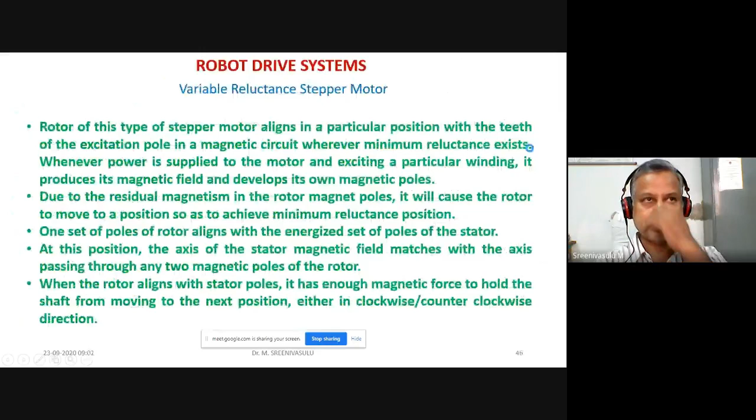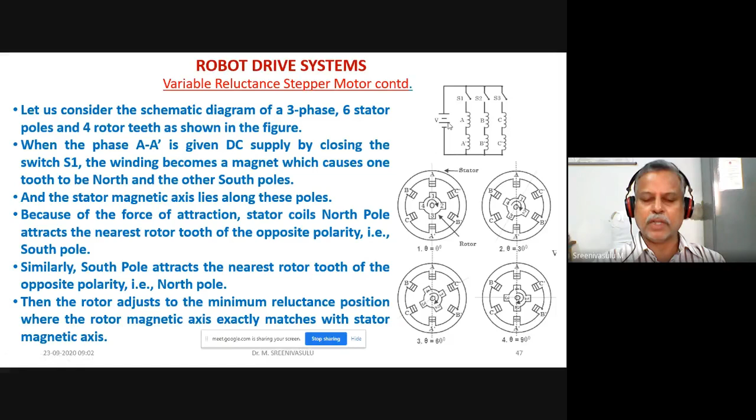In order to change the phases, you are going to play with these switches S1, S2, S3. When S1 is in on mode, the other two will be in off mode, and A and A dash will be in short. When S1 and S3 are open, S2 will be in short, and B and B dash will be in short. When S1 and S2 are open, S3 will be in short, and C and C dash will be excited.

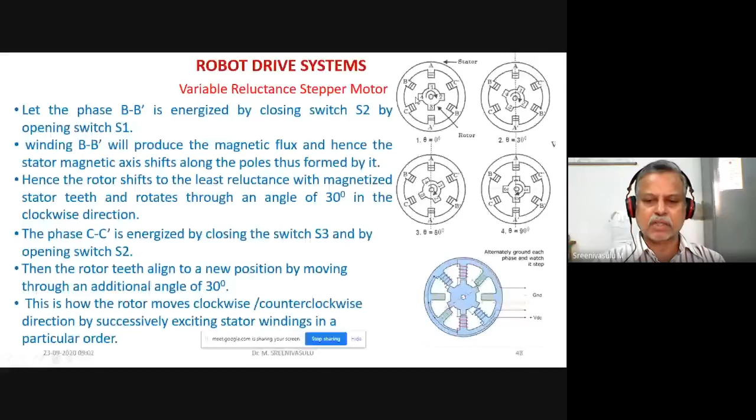Accordingly, the indexing and the angle of index actually depend upon the number of poles on the stator and the number of poles on the rotor. There was an expression to give you an idea: the step angle equals 360 divided by the number of phases, that is 3, multiplied by the number of poles on the rotor, or the number of teeth on the rotor.

When you want to reduce that step angle further, sometimes it may not be possible to accommodate more teeth on the rotor. So instead of a single rotor, they take the support of 3 rotors, and the number of teeth accommodated on these 3 rotors contributes towards the reduction in the step angle.

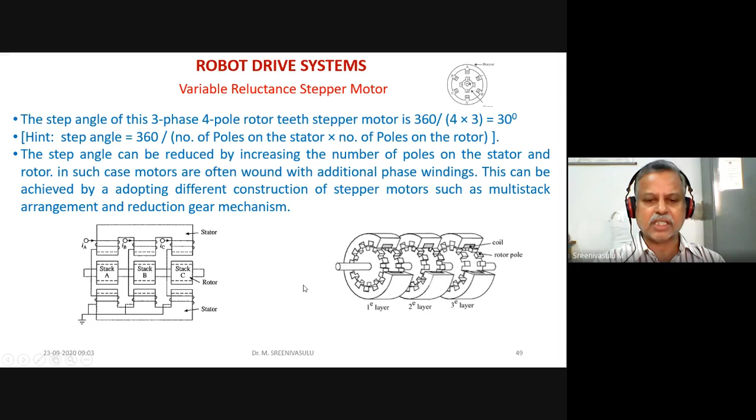Now, this is the permanent magnet stepper motor. Here you can see alternately each and every pole available with the stator is getting excited, and the rotor has a permanent magnet. Because of that, north and south poles have been shown in the picture, and that itself has been made to rotate. Once the north and south poles belonging to the permanent magnet are rotated, the pole which comes close is going to be opposite.

S is actually the south pole, colored blue. So the other pole, whatever is coming close to the south pole, becomes red. The excitation comes first, and that attracts the unlike poles, and that is how the rotation happens.

In the third statement, it has been stated that it works on the principle that unlike poles attract each other and like poles repel each other. This third point was in my mind while explaining other aspects too, because the same concept applies to magnets, whether electromagnetic principles or permanent magnets are used in a motor. North and south poles will attract, and south and north poles will attract, and because of that, the rotation happens.

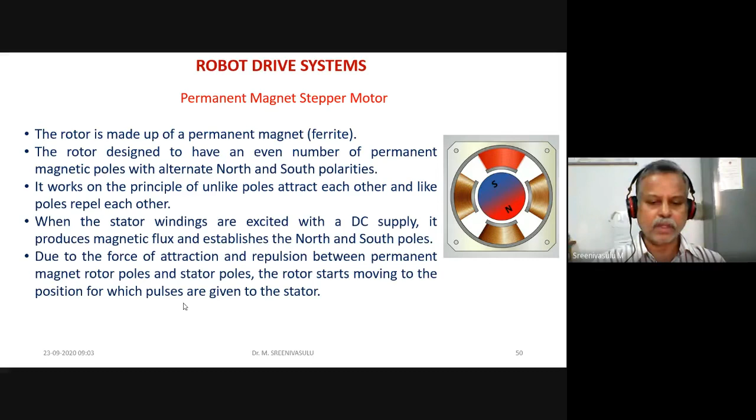Anyway, let us see what exactly is being done here. There were 4 poles, and out of them 2 opposite poles were connected through a wire. That's what has been said here.

Let us consider a 2-phase stepper motor with 2 permanent magnetic rotor poles as shown in the figure: north pole and south pole. For the 2-phase instance, this is phase 1, AA dash, and this is phase 2, BB dash.

In the beginning, when you excite it, south pole forms on the stator, and on the opposite side you see the north pole on the stator. The permanent magnet has north and south poles in a particular direction. North gets attracted by south, so north and south are in line. Here you have south, and that south and north are again in line. So they were attracted, whichever position they were in earlier, and now they try to be in line because of force of attraction and repulsion, and they come in line.

In the next instance, instead of AA being excited, AA was excited first, then in the second instance BB was excited. Because of that, you can see clearly the north and south poles on this side, and south pole attracts the north while north pole attracts the south. That contributes towards the rotation.

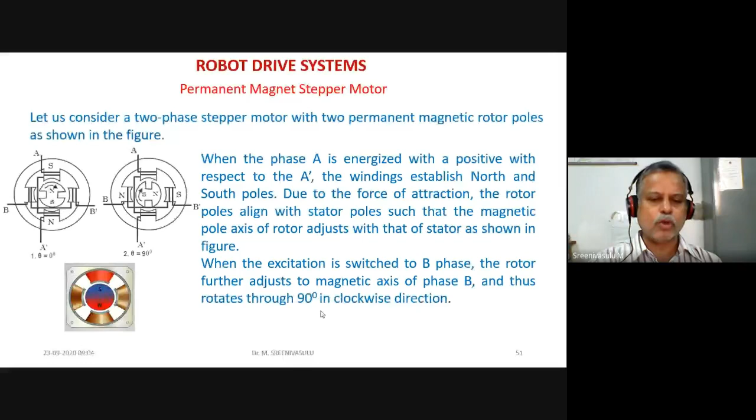Because of this, the indexing, the step angle, is going to happen by 90 degrees. If you go for 4-phase, then the step angle is going to be 45 degrees. Likewise, you can go on varying the number of poles, and that will take care of those things.

You can see here, this is with 0, this is with 90, and next time that is going to be in line, dealing with theta 180 degrees, and this is going to be for 270. So figure 1, 2, 3, 4 correspond to 0, 90, 180, 270, and again 360 which is the same as 0. With reference to these figures, the explanation given earlier proceeds the same way.

Now the calculation pertaining to the step angle was shown. The step angle of this 2-phase, 2-pole permanent magnet rotor motor is expressed as 360 divided by the number of phases multiplied by the number of poles. So 360 divided by 4 gives 90.

The step size can be reduced by energizing two phases simultaneously. In this case, when they want to regulate or manage the step angle, the method is that two phases are excited simultaneously, one phase on and second phase on modes with appropriate polarity. We won't go into depth, but there is a table where on/off states are indicated with 1s and 0s, and that order keeps changing, which is how they control all those regulations.

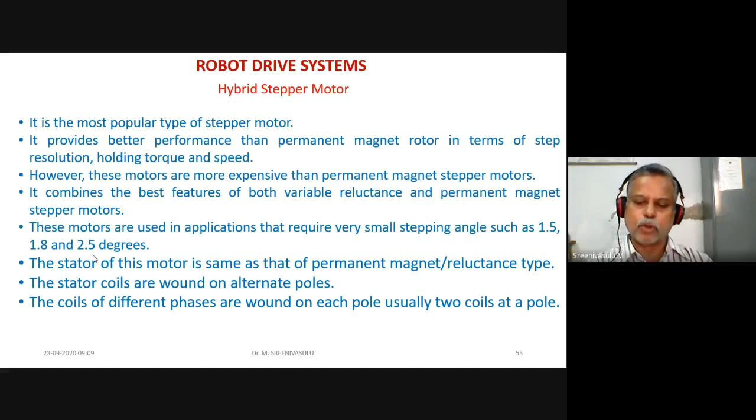The coils of different phases are wound on each pole, usually 2 coils at a pole. That's the meaning there. Anyway, if you consider the stepper motor here, you can see the rotor.

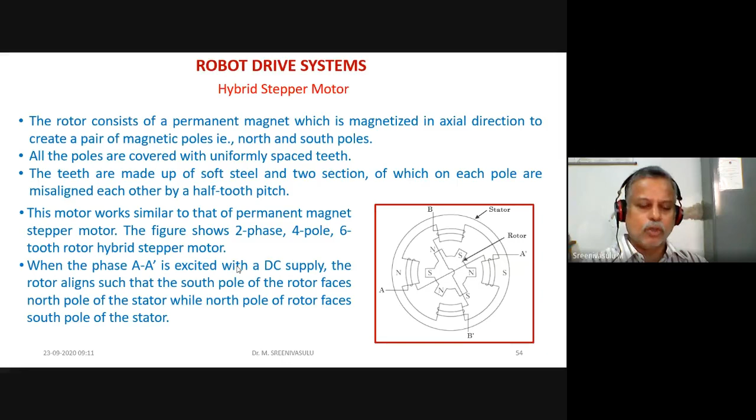Once you know the principle of operation for one motor, the same principle applies for everything. For every excitation, the rotor will get locked into a new position, and even if excitation is removed, the motor remains in its locked condition due to the permanent magnet excitation. The advantage of the permanent magnet is that it continues the attractive force, keeping the locked condition even when excitation is removed. That means when there is no supply for either phase AA-dash or phase BB-dash, the self-excitation of the permanent magnet ensures that the rotor will never be permitted to rotate.

In the permanent magnet type motor, the step angle was observed to be 90 degrees. Here, the combination of permanent and variable reluctance is the hybrid type, associated with two-phase, four-pole and six-tooth rotor motor. Now, considering the number of phases and number of teeth on the rotor, the same expression as before still holds good: 360 by 2 into 6, which equals 30 degrees.

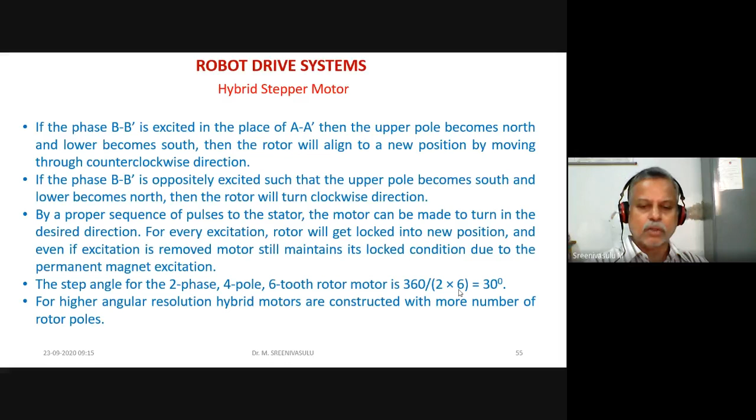So what you should understand is, earlier at the time of specifications, we noted the accuracy we want to achieve, the minimum displacements, and what might be the work volume we need to handle—whether that is on par with Cartesian, polar, or spherical coordinates. All those requirements should be stated.

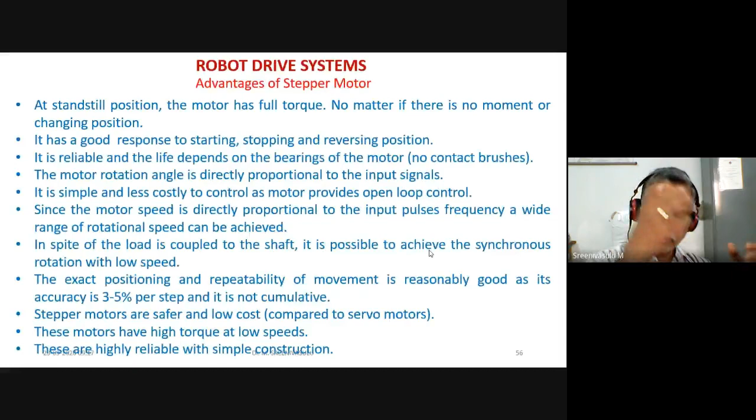If you don't state your requirements properly, you can see here, once the step angle has been fixed by the number of teeth on the rotor, even if you intend to get a much smaller step value, it is not possible. If you want to make it possible, the entire motor you procured earlier would have to be replaced. That is why, at the time of placing an order with a particular specification, we must be very careful and keep all aspects in mind before proceeding. Prior planning is essentially required for any sort of success you are aiming at.

Let us see what has been stated here. At standstill position, the motor has full torque—this is basically because of the permanent magnet—no matter if there is no movement or changing position. That means, in the standstill position, there is full torque, so if you try to move it manually, you cannot, unless you push it with a higher amount of torque than what it is exerting, which might spoil the motor.

It has a good response to starting, stopping, and reversing positions—the moment you want to start, it starts; the moment you want to stop, it stops; the moment you instruct it to reverse, it is ready to do so. It is reliable, and its life depends on the bearings of the motor, since there are no contact brushes.

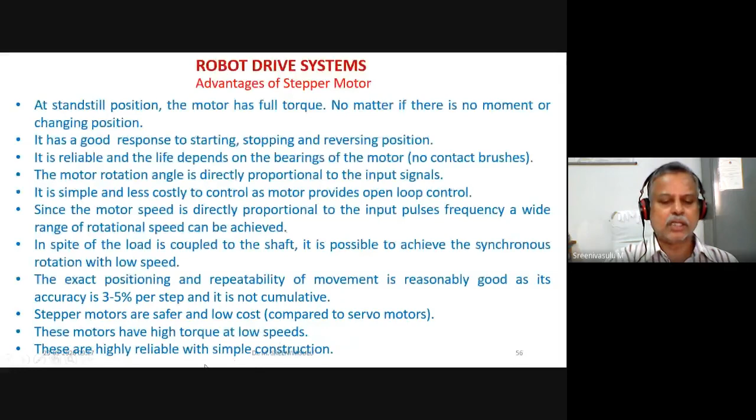Then, in spite of having so many advantages, some disadvantages will be there. These disadvantages and advantages are being represented keeping in mind the other two motor types, with respect to both advantages and disadvantages.

Stepper motors have low efficiency. It has low accuracy — contradictory statements have come because earlier we stated that this has good repeatability and accuracy, but now here they are stating it has low accuracy. That low accuracy may be because of the open loop circuit, or maybe with respect to comparisons being made with one of the other two motors.

Its torque declines very quickly with speed. At low speeds, no doubt it has high torque, but when the speed rises, the rate at which the torque declines, compared to the rate at which the speed rises, is noticed to be very, very high with respect to the other two.

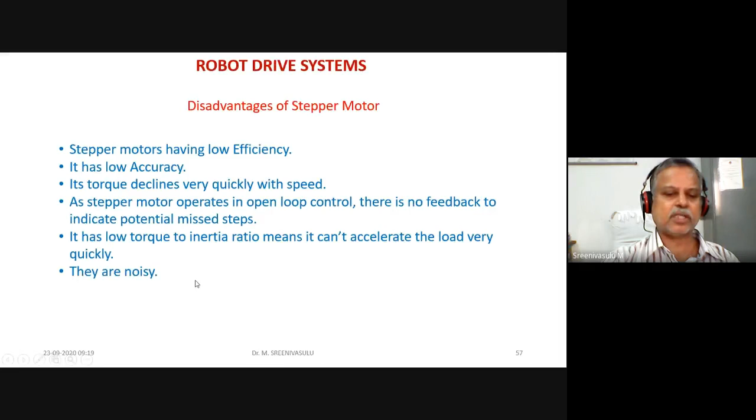Anyway, they are noisy. So at the time of their operation, we found that they make a lot of noise. Some applications, when you look at manufacturing sector and security devices: in manufacturing, like automated production equipment, automotive gauges, and industrial machines for packaging, labeling, filling and cutting.

You may notice these applications are so simple: packaging, labeling, filling and cutting. But the pace with which they can finish those tasks is incomparable with the pace at which a human can manage those issues, because they deliver those jobs without experiencing any discomfort, even if put to work for many hours continuously. It is not the case with human beings.

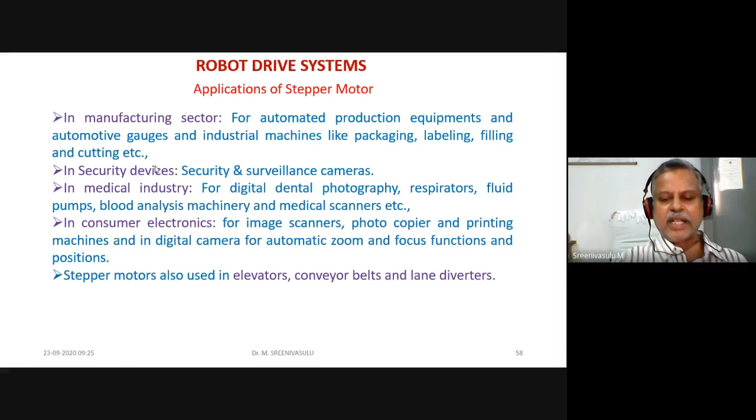Now let us move to the servo motor. A servo motor is an electrical device that rotates parts of a machine with high efficiency and great precision. So the first statement itself gives its advantages with respect to precision and efficiency. The moment this is stated, it indicates that its performance was compared with the available motors. Maybe at the time of inventing that particular servo motor, whichever motors were available were all taken into account for comparison.

With reference to that only, this statement would have been issued. The servo motor could be DC or AC, and they can be used to push by a specific distance, or to rotate an object by a specific angle with great precision. It is a simple motor which runs through servo mechanism. What is the servo mechanism? We will see if time permits.

One particular aspect you should keep in mind is that servo motors make use of, or take the support of, servo mechanism to control its motion. It could be linear motion or rotary motion. So the servo mechanism might be an integral part of that particular motor. It might even happen on those grounds. Let us see, if possible, in the forthcoming slides. And of course, it is quite possible to get high torques.

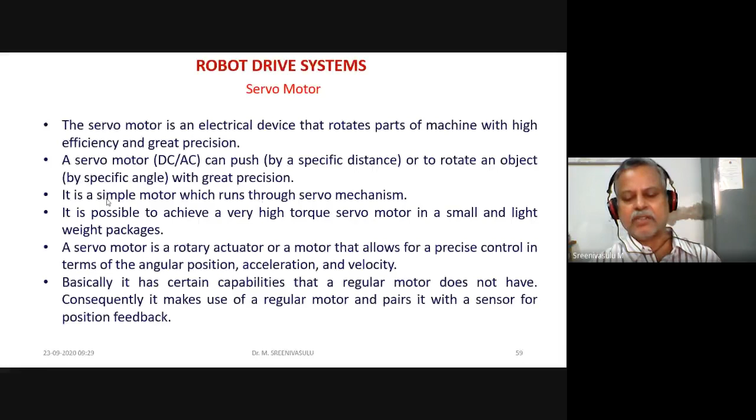So once these two are paired, we are going to get the feedback for a particular input. What exactly is the output it has really given? We are able to sense that information straight away from that.

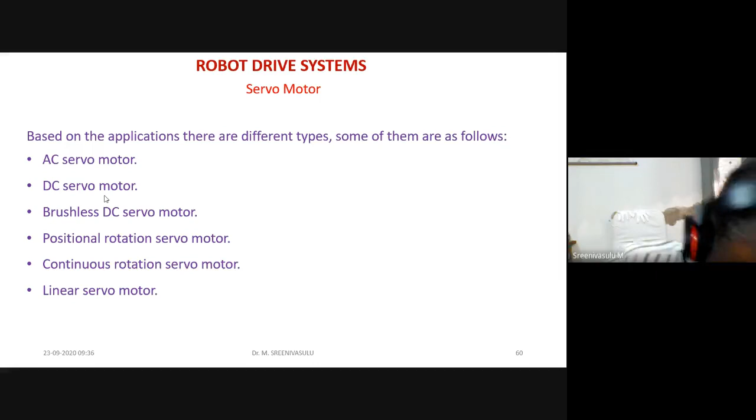It is something like, suppose I am trying to take feedback for each and every session. Session one, taking feedback on that. Session two, taking feedback on that. How is it helpful? Maybe in session one, few contents I will be covering, so I will be getting your feedback and your extent of understanding of exactly what has happened in that particular session. I will be receiving that as an input on that particular session.

The moment I have received feedback on that session, I will be able to rectify the pitfalls noticed, for the next slot. So that continuous feedback I can take, continuous pitfalls I can notice, and continuously I can apply the changes, so that maybe after 10 or 15 sessions, I might tune to you, or you might be tuning to me. Perfect tuning will happen when you are giving feedback properly, and when I am receiving your feedback on general grounds, and when I put sincere efforts to make corrections wherever required from my side. So commitment should be there from your side as well as from mine.